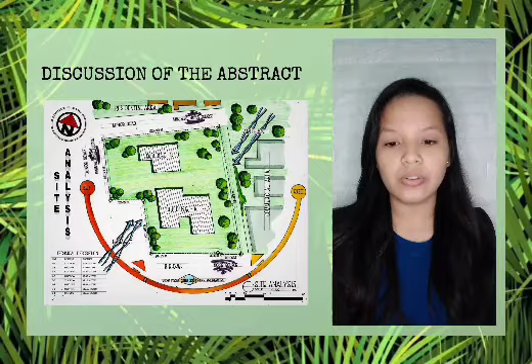I am here together with my partner Ana Dominic Agosto to introduce and justify our design for space planning project, a proposed barangay complex in Barangay Basak Pardo, Cebu City, with a lot area of 13,667 square meters.

The researchers came up with a study to help developmental growth of a community in response to improve quality of life, starting from the smallest unit of the government. This study was determined by how important a barangay stands as the basic unit of the community. Community centers are designed as the focal point for all age groups in a locality which promotes social

relationships and mutual support, develops sense of self-reliance and responsibility of cohesion within the community. Designing a barangay complex, establishing sustainable architecture with the means of adapting passive design for natural ventilation, natural lighting, and less energy usage, and also promoting Filipino indigenous architecture.

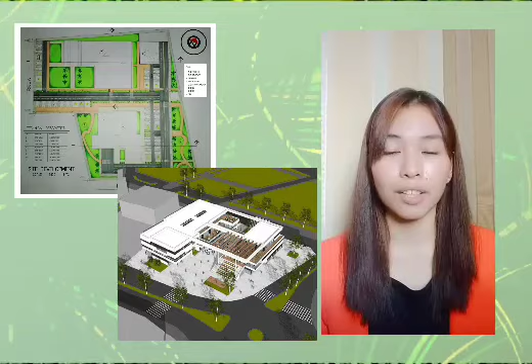These are seen on the accented walls and ceilings of the building. The building concept reflects the ways, culture, and traditions of the Filipinos. Using the concept and the principles of modernized indigenous materials such as bamboo, palm trees, and the efficiency of green architecture in and out of the complex, meaning it is reflected in the interior design and on the landscape design.

Research have been made successfully with the advantage of technology despite the pandemic, evaluating the lapses and what amenities are needed to suffice the needs of the growing community. Through online surveys with the respondents of Barangay Basak Pardo residents, we were able to identify factors which mainly affect the building function.

The needs of daycare centers, shelter for the homeless, fire station, a larger healthcare facility for the sick, and a multi-purpose hall. These were established for functional use of the building to be able to accommodate the needs of the people.

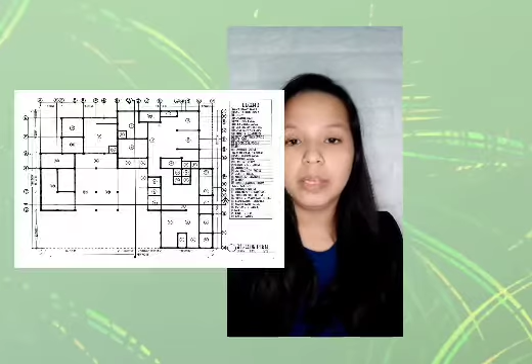Building A, with the approximate area of 1,448 square meters, contains the major facilities: the barangay hall, the healthcare center, the fire station, together with the garage for the fire truck and the ambulance, facing the major road for direct access and exit whenever an emergency case occurs.

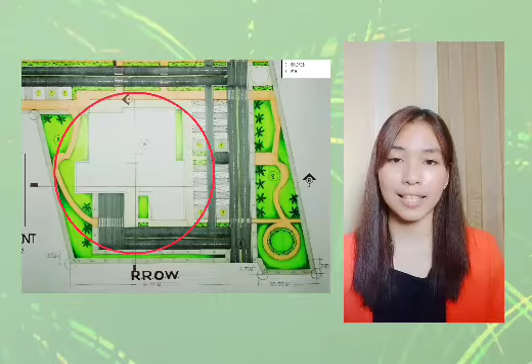Building B, with the approximate area of 2,002 square meters, contains the public zoned areas: the cafeteria, multi-purpose hall, activity hall, shelter for the homeless, daycare center, and the playground. It is where the social interactions usually happen.

Following provisions and ordinances with the government, adapting barrier-free universal design, making advantage of high-ceiling one-story buildings through adapting a passive design of sustainable architecture with less power needed and taking advantage of natural light and ventilation within spaces for comfort to users when experiencing it.

Four strategies and objectives were outlined to guide researchers in designing a functional barangay complex. Objectives include to observe and implement green architecture. Strategies were taken through passive sustainable design, roof insulation, building orientation, and natural lighting and ventilation.

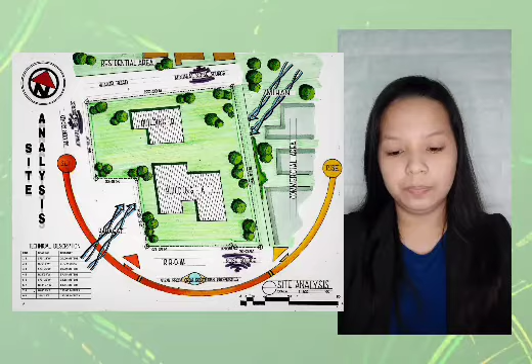Strategies are also used in active sustainable design, using renewable energy systems, a strategy of green building material finishes, and a strategy of storm water management.

Another objective is to improve economic stability with the institutional buildings, a way to provide income from spaces to be rented and also provide shelter for the homeless, taking a strategy of thorough space planning.

Another objective is to provide accessible spaces and directive areas where proxemics or personal spaces and group meetings are highly given priority, especially for the authorities. The strategy taken is the proper zoning of spaces.

And the last objective is to promote indigenous Filipino architecture, the strategy of native landscaping, and the use of native materials in terms of building accents.

The researchers highly recommend to enhance this study with a high extent of using strategic design of open space planning for future expansion in accordance with the community's needs within the barangay, sustaining the adaptability to cope up with the changes in the environment and or the government ordinances.